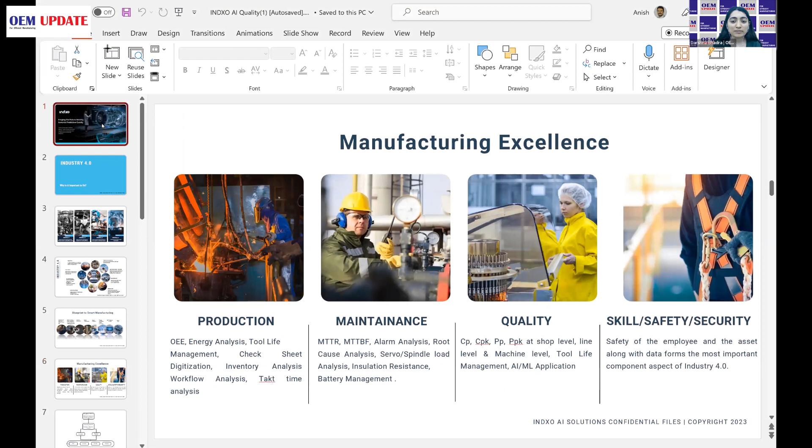During his tenure as Director of Product Development at Electrono, Anish played a pivotal role in spearheading smart factory transformations for industry giants like Honda, Toyota, Mahindra, Hyundai, Bosch, and others. His background in computer science is complemented by an executive master's from the Indian Institute of Management, Calcutta. Furthermore, he holds dual master's degrees in management from All India Management Association and Christ University.

Today, Mr. Pandari will talk on quality in AI and IoT integration for smart factories. Please join me in welcoming Mr. Anish Pandari.

Like the slide my predecessors showed, we are talking about the evolution from the Industry 4.0 standpoint. What we notice now is the kind of change that is happening. Earlier, it used to be that century, this century. Now it is in decades. The change is happening in decades.

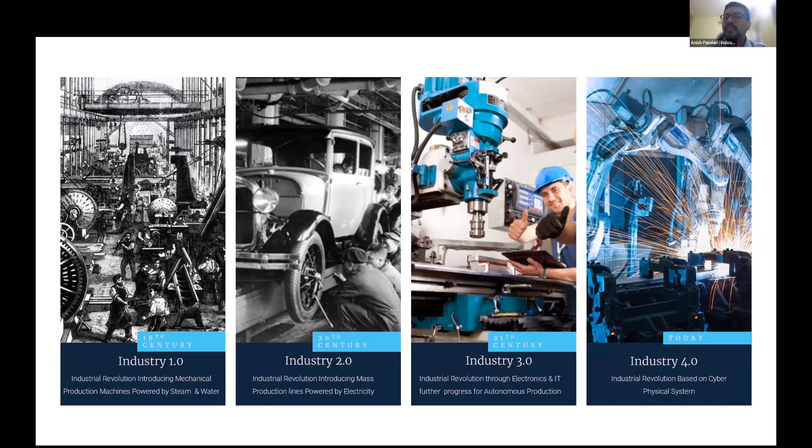For example, we are already talking about Industry 5.0, which is bringing in the complete sustainability aspect also. So right now, as we speak, Industry 5.0 becomes the new norm, and we believe that these changes going forward will be even more rapid, and that has all got to do with this huge data that is coming into play, and the kind of information that we can derive out of the same.

So when you talk about Industry 4.0, if we dwell a little deeper, these are the critical elements of Industry 4.0 that we look into, wherein the basis of most of it forms the IoT platforms. The IoT, where the ability to collect data from the shop floor. When you talk about shop floor, it consists of production machines, the CNCs, the PLCs, the sensors, the quality, the CMMs, the gauges. The ability to connect data is the most critical scenario here. This is where most organizations fail.

They are not able to get data from all these places, because obviously in a shop floor you have all kinds of machines, right? From the CNC side itself, you will not have just Fanuc, you will have Siemens, Mitsubishi, Mazak, Heidenhain, Haas, right? You have so many different kinds of CNCs. PLCs, again, similar, Rockwell, Siemens, Mitsubishi.

And sensors, again, multiple types, and similar with the CMMs, you have Zeiss, Hexagon, Mitutoyo, and a lot of other digital quality machines and quality equipment. Ability to connect data itself is a big area. And once you collect the data, then comes the biggest hurdle, the ability to assess this data and make logical or meaningful sense out of it. And this is where, again, most of them fail, because taking informed decisions out of something as complex as machine data is not easy.

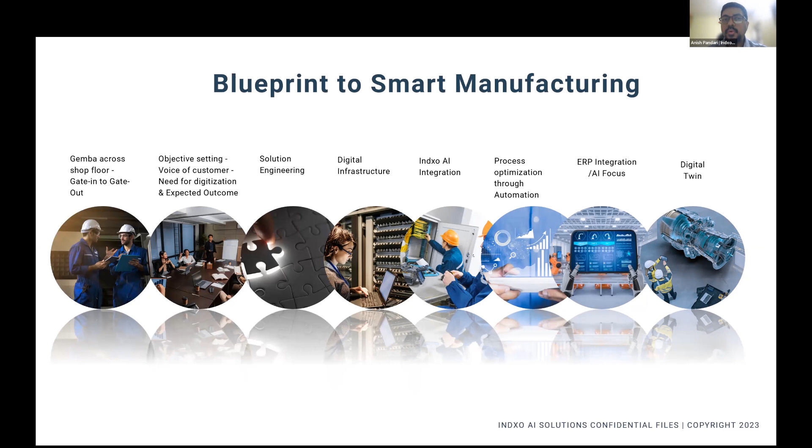Further moving on, we go on to the process optimization once you have the basis formed, and then we suggest going for the ERP or the digital twin as the next stages. So this is a basic flow of how we go in terms of the blueprint. Now, from the manufacturing side, I have picked about four most common areas and departments in the shop floor that we try to work very closely with.

One is the production shop floor, where most of them want to know what is happening about their production without any human involvement. How do you get what is happening in the shop floor without any human involvement? So these are some of the parameters: the OEE, the energy analysis, tool life monitoring, etc. from the production side. Similarly, the maintenance: how can you have relevant predictive maintenance? How do you have real-time alerts to the system where people can ensure smooth functioning without any downtime in their shop floors?

Quality, again, the complete Cp, Cpk, Pp, Ppk, the complete shop line level tool life assessment, etc., is a very critical aspect. And finally, the skill and safety, which goes without saying. Skill level of the employees plays a significant role in terms of how that needs to be assessed and improved in terms of the outcomes. And safety, the cybersecurity and environmental safety becomes another critical element of this bucket. Moving on,

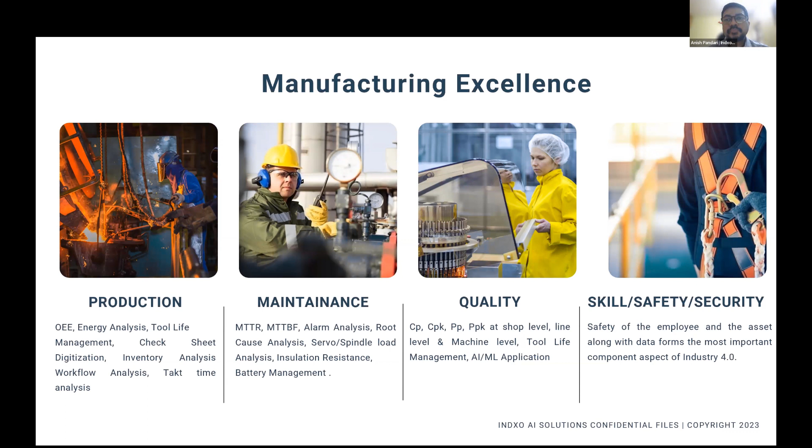as my topic is concerned, I will be sticking to quality as one of the elements, right? So when you get into quality from the entire gamut of the shop floor, the critical element that comes is again the yield or the throughput. So it's measured in terms of the good parts that are produced minus the bad parts. The bad parts are further divided into two: rejection and rework, right?

So in terms of the kind of output produced, the throughput, which is the good parts divided by the total number of parts produced, would give the throughput or the yield percentage, which is the calculation to understand how good your performance is in your particular organization.

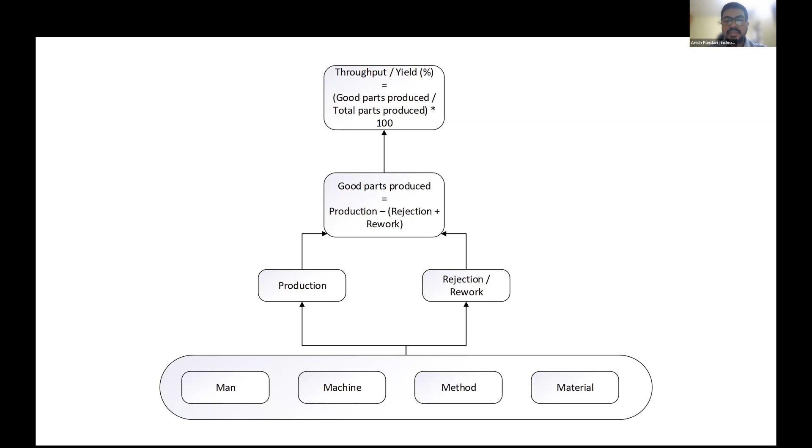Now, moving on, these are the various factors through which all these elements influence the quality or the output of the particular system. When you talk about man, like I mentioned, the skilled workforce plays a critical role, the training certifications of the people, the human expertise, etc. And when you talk about machine, the state-of-the-art equipment, what kind of equipment are you using? Those play a critical role, the monitoring, automation, and the maintenance and the calibration of the systems, right? All these are critical to ensure that from the machine side, you are able to produce the relevant quality output.

The methods, as you know, this is probably something which has been there for the longest. We always talk about the quality control methods, the Kaizens, Six Sigma, total quality management. But now with the digitization, these are implemented with a renewed zeal, because earlier we were not able to implement the methods properly. In the next step, I will tell you what was the reason for the methods failing in some places, and how we can ensure that we can do it better.

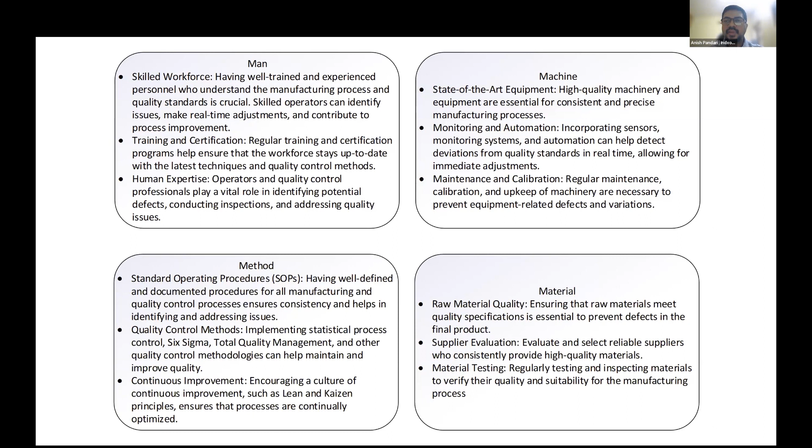And finally, the material, obviously the raw material quality, supplier evaluation, and material testing, etc., plays a critical role again from the quality aspect. So we've seen that in methods, there are a lot of places where it fails, and what is the reason for it to fail. And that is because what is not defined cannot be measured, what is not measured cannot be improved, and what is not improved will always degrade. The whole concept of continuous improvement.

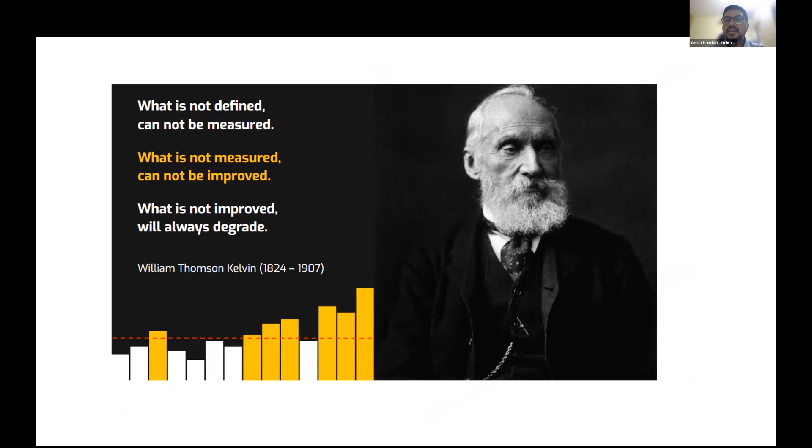And here is the critical element of measurement, right? In the previous methodologies we were talking about a lot of TQMs, but real-time measurement, which was lacking, was one of the reasons for the failures of most of these kinds of methods. Now with improved measurement methods, we are able to bring about significant changes to this, and are able to provide better quality outputs in organizations.

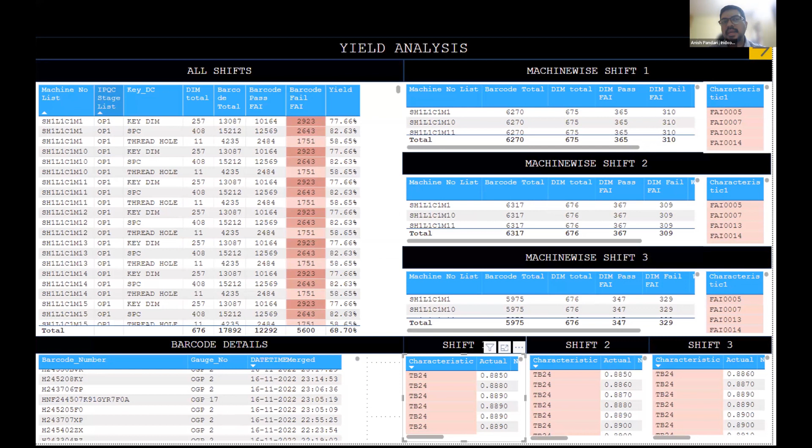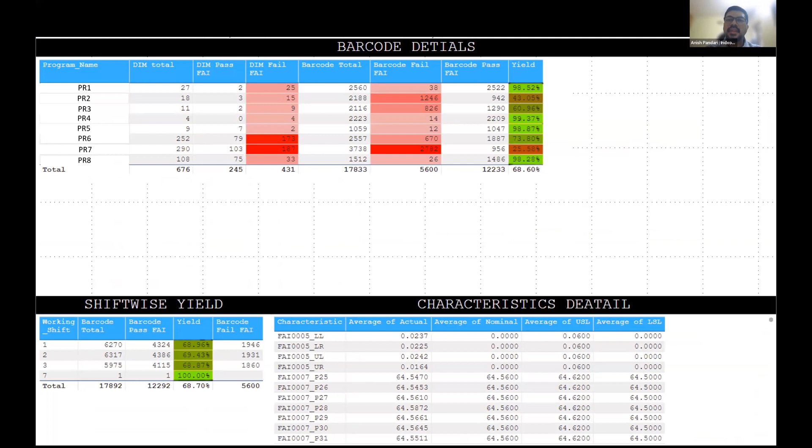So just to touch upon the kind of yield analysis that we end up doing, these are some of the real-time dashboards where we would be able to track real-time yields, shift-wise. You can look at the total yield. You can look at the complete real-time failure analysis, what parts are failing inline, like Avin sir mentioned, the real-time inline quality, so that you can take real-time correction and you don't have to wait for the entire part to be checked for quality, which is a lot of wastage of time. Real-time correction, real-time alerts to ensure that these things are taken care of.

These are some of the dimensional reports. For example, one of the customers that we work with has close to 900 parameters that they measure. When you talk about quality, you can go to any depth in what you want to measure. So quality, like I said, is an obsession for a lot of teams. It brings a lot of brand value to the organization based on the kind of output that you are able to produce.

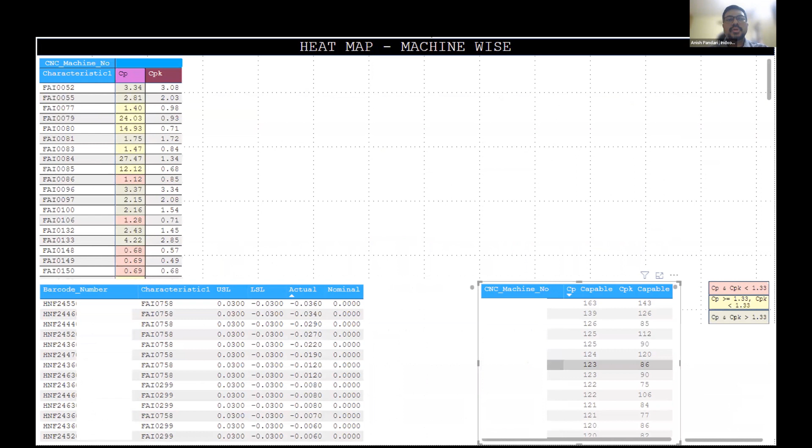So just touching upon some of these real-time screens in terms of the heat maps that you can get, inspection overviews, the process analysis, different ranges. These are again some of the screens that we provide for various quality outputs. The various process inspection capabilities, the cross-correlation analysis, in-process focus based on the mathematical functions, as to how you can ensure that there is less anomaly and better outputs.

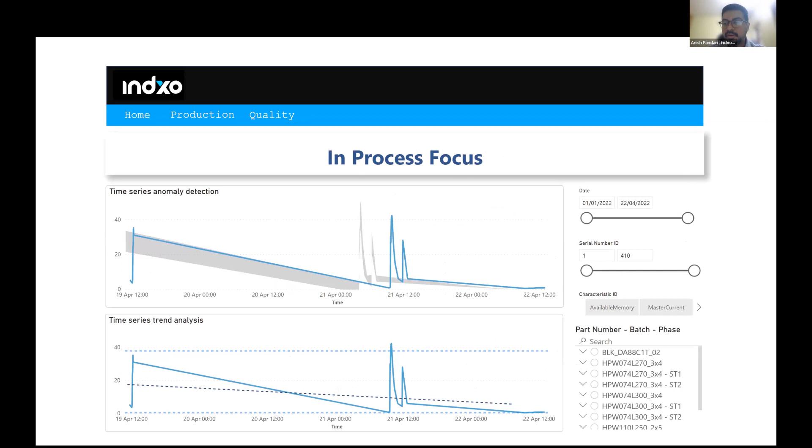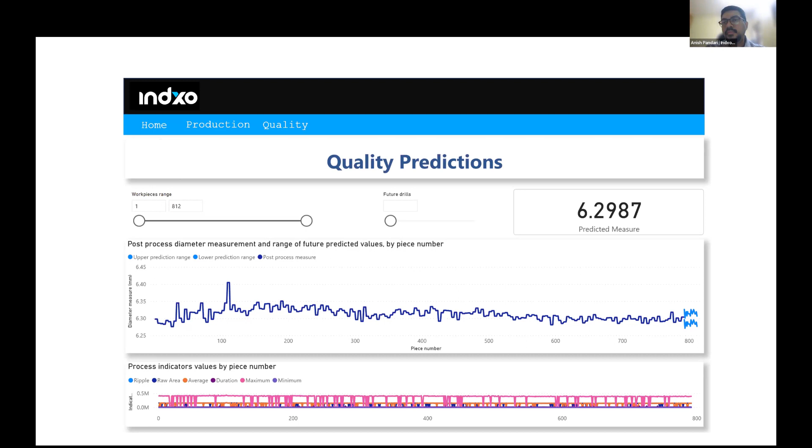And the prediction factors: based on the previous quality parameters, how can you predict what would be the kind of yield that is going to come out. A very significant necessity for most of these shop floors, where they need to understand the predicted quality of the product that they're expecting as output.

Thank you, Mr. Pandari, for sharing your insights on quality in AI and IoT integration for smart factories.